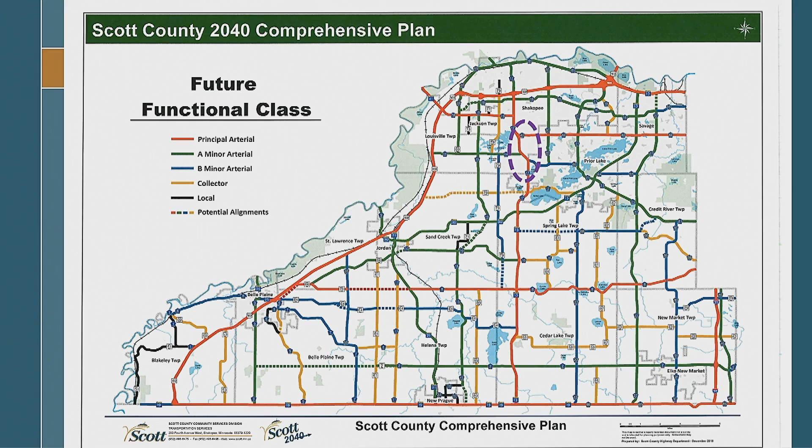Do we have a pointer that you can use? Let's see, is it the screen button? Oh, it doesn't work on the TV. How do we get it onto the monitor? Is there a mouse I can use, okay. There you go, thank you. See that? Okay. Proceed.

This purple circle is our project area. Highway 17 runs north and south through the center of the county, designated as a future principal arterial. It's pretty unique in the county, running continuously north to south, with a lot of connections to Highway 169, St. Francis Hospital, regional parks, and entertainment venues. The spacing makes a lot of sense, with 35 on the east side and 169 on the west, and Highway 17 running right through the middle. Principal arterials like 35 and 169 are that expressway, freeway type of roadway facility.

But it also includes something like 42 and 17, which maybe are a step down from that, but still the priority is on mobility and safety on those corridors and really making efficient trips through the county. The last thing I'll point out on 17, in terms of its unique position, is that it actually touches every one of the other principal arterials other than 35 on this map. From 169 to 78, 42, 8, and 19, it touches all of those, which is a key component of a principal arterial.

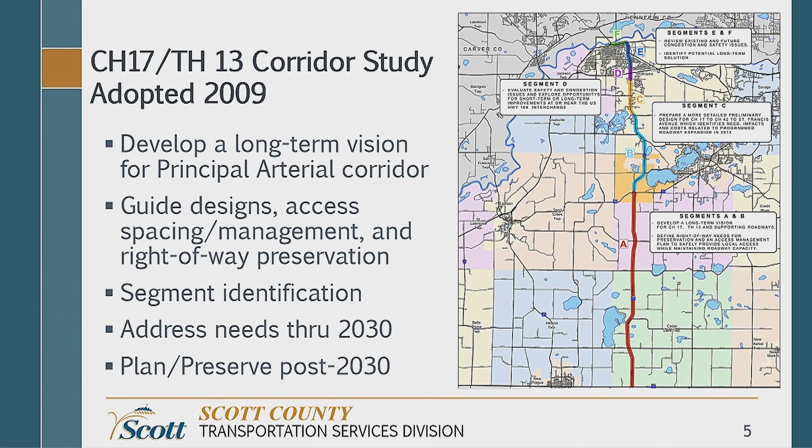So having that understanding of this as a principal arterial roadway, the corridor study was adopted in 2009, providing that long-term vision to convert this roadway to a principal arterial. It had various segments of projects to achieve that vision, and it addressed the needs for projects through 2030, and then also some recommendations to preserve right-of-way into the future beyond that.

One other thing mentioned in the 2009 study was a supporting roadway network, which is very critical for a principal arterial, because that facility is very focused on mobility and moving cars along it. There's a need to have roadways adjoining that to provide local connectivity to destinations. So there's obviously a lot of these yellow lines showing thoughts of supporting roadway networks that could happen from that 2009 study, and we'll have more on this later in the presentation.

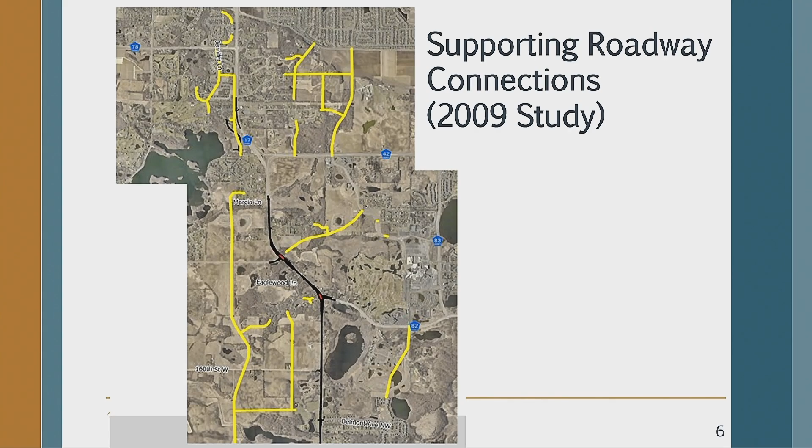I guess the one thing I'll mention, let me go back to that - Jennifer Lane is one road on the west side of 17, north of 42. In 2015, there was a county construction project on 17 to upgrade that segment, and Jennifer Lane was constructed at that time, which did provide a good local connection and helped mitigate the loss of access on that as part of that project. I kind of covered this on the map, so I'll skip over this briefly, but again, this is just why 17 is important as a principal arterial.

Just to mention that corridor study was obviously produced in coordination with our partners along the corridor: Shakopee, Prior Lake, the townships, and MnDOT as well.

So our project area falls within segment B of the corridor study. The corridor study recommended a 4-lane facility with intersection improvements, grade separation at 14 and 82. The ADTs, which is the daily traffic anticipated in the study in 2030, is much higher than what we're seeing out there today. So that's where I'll talk later about how we're trying to right-size this project based on the development that has actually occurred to this point and is expected in the future. It does identify some criteria for access management and trying to get it to that future principal arterial.

So a little more background, moving on from the corridor study, we have started to implement these projects over the course of the last 15 years. In particular, the red, yellow, and blue projects were completed in a span of 5 years, from 2011 to 2015, and those did upgrade 17 to a 4-lane road and manage the accesses along that as well.

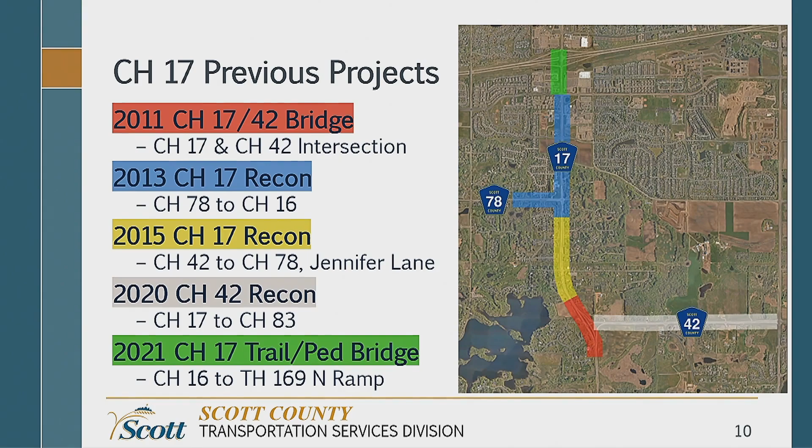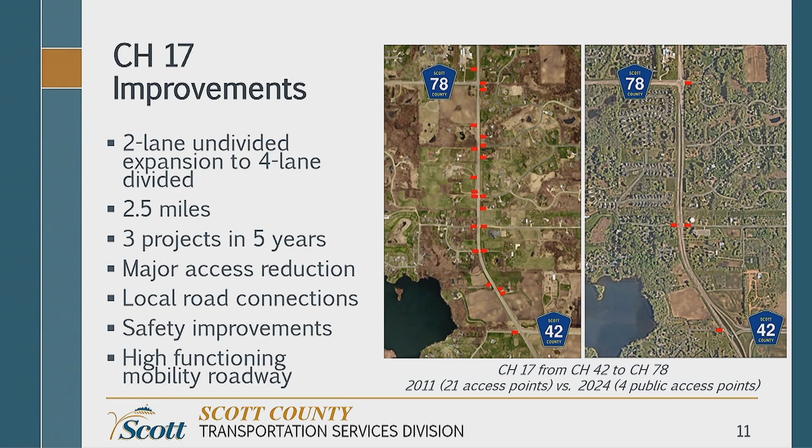And this really has resulted in a safe and highly functioning principal arterial in this area. This section has been converted officially to a principal arterial and functions very well today. All the folks that live to the south of here can use this roadway to get to a lot of destinations to the north, and we're trying to achieve those same goals here on this next phase to the south.

All right, so that's my preamble. This brings us to the project that we're planned for 2027. Our goal with that project is to design a safe mobility corridor consistent with the corridor study and achieving that principal arterial criteria. As I mentioned, we do want to right-size this project. The traffic volumes in this segment of the roadway of the corridor are not as high as was forecasted in the corridor study, and that has been a process that we've gone through with the PMT.

As Alex mentioned, the city of Shakopee, city of Prior Lake, and the Shakopee Mdewakanton Sioux are all on that project management team, and we've worked together starting with a visioning process, into layout development, and through the public process to get to where we are today with the layout.

What that project entails is a 4-lane divided highway. It does include improvements at Highway 82 and Highway 14. Those are not grade separated as proposed with this project. However, as I'll show in a future slide, there's opportunity to convert those to some grade separation in the future. That's accommodated with this design. The project also includes some access management in terms of existing driveways along 17 in this area, and then also with the secondary intersections at Eaglewood, Norton, and Marcia.

The project has a very large trail component to it, which is very exciting. I'll have a slide on that later on. And it does include some local road connections, similar to that Jennifer Lane project, to help mitigate some of the access management and continue to have that local roadway network to support the principal arterial. And again, this is planned for 2027 construction.

Questions? Okay, all right, thank you. This is the southern segment of the project, so I'm just going to go back real quick.

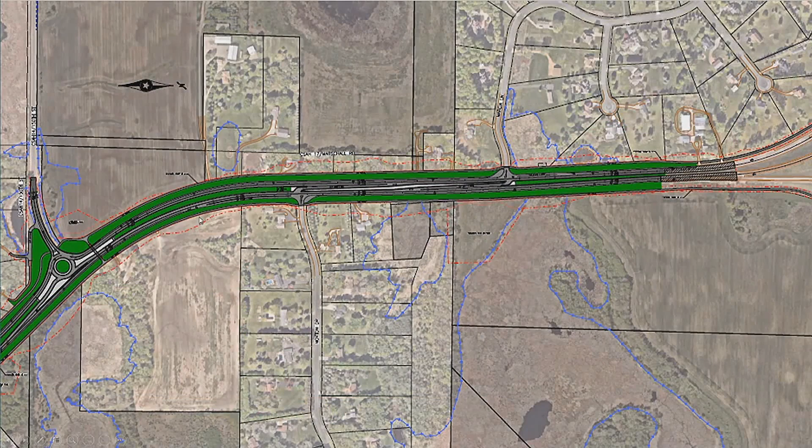This is Highway 14 and Highway 17. Wrong way, now I'm really going to confuse everyone. Highway 14 and 17, and now this is that same 14 and 17 intersection, so this is the next segment to the south. The local road in this area is Eaglewood Lane.

This is their only way in and out onto 17. It's proposed as a right in, right out. That's the same as we had it at the open house. We did not receive strong pushback on that at the open house. It is pretty reasonable as they're situated between the two roundabouts.

So just to walk through those same kind of movements: if they're leaving their house and heading south, they can take a right out freely. If they're heading north, they take a right, do a U-turn at the roundabout, and head north. Similarly, when coming home from the north, they can just take a right into the neighborhood. If coming home from the south, they would go up to the roundabout at 14, do a U-turn, and go in. And that distance is about a quarter mile in either way.

So we're proposing a new intersection on 14 that would come down here and feed into Bridge Crossing, which is what Eaglewood turns into within the neighborhood. It would provide a back exit for that neighborhood to get out to the west on 14 if they want. It also aligns with long-term development here to the south in Prior Lake. This goes down to 160th Street.

Would you be able to make a left on 14 coming out of there? Yes, you would. And who owns the property on both sides of that road? So this segment here is owned by the Shakopee Mdewakanton Sioux. That's that portion. And then this neighbor, Clemenhagen, is the last name of this property owner.

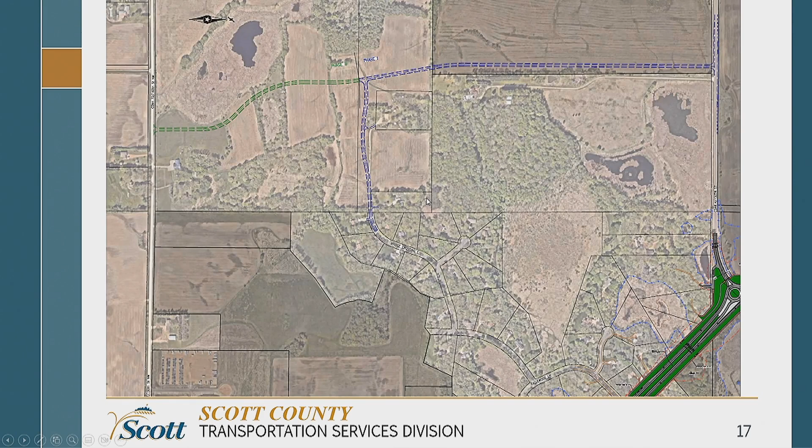And you're building that with sales tax dollars as well? Correct. Right of way - is Mdewakanton going to donate the right of way? That's the hope, we're working with them on it. They're definitely part of the conversation.

So I think that's kind of the layout. I'll bump quick back to the full view just to show south of 82 - the project tapers down to 160th, that's our tie-in point. Those are the storage sheds that SMSC constructed, if you're familiar with that landmark. So that's the extent of the project at this time.

Again, the corridor study discusses this going further south. We are looking at putting a roundabout at Highway 17 and Highway 12 to the south of here, in the same timing as this project, in Prior Lake and Spring Lake Township. And then MnDOT has proposed a project, or they're in the process of scoping a project, at Highway 17, Highway 13, Highway 282 - that funky intersection there. They're proposing, it sounds like, likely a roundabout in the 2029-2030 timeframe.

So those are some upcoming projects to the south of here.

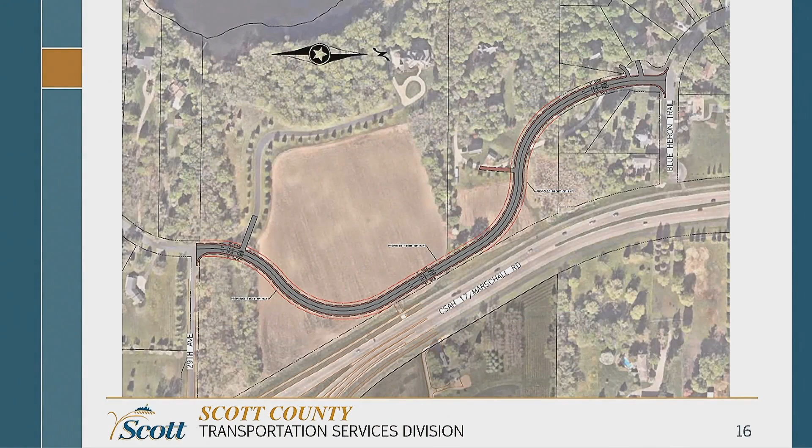Let's pass through these exhibits. You've probably heard this from Alex, maybe at his previous presentation, but just to touch on it quickly - the roundabout design at the two intersections. What we're proposing on the left is to be constructed now. It's a roundabout with a bypass lane, taking advantage of the three-leg orientation of these intersections, which affords us the opportunity to have a bypass lane in one direction at each of these intersections.

So here at 82, that bypass is in the southbound direction. If you're going straight on 17, you can just bypass the roundabout entirely. Otherwise, you go on the interior lane and make your maneuver as you would.

On the right is shown the future vision and how we could achieve that, hopefully with minimal cost in the future, building one bridge. We've already got the southbound bypass constructed. Now we need to bypass northbound so that they can stay out of the intersection. So we would build a bridge to take the northbound movement up and over the roundabout so they can continue without having to navigate an intersection.

And if you're trying to turn onto 82, you would go into the roundabout still, almost like an interchange ramp junction. So we think this is a good way to right-size the project - build what's needed now, but also set us up for the future if and when traffic out there dictates that.

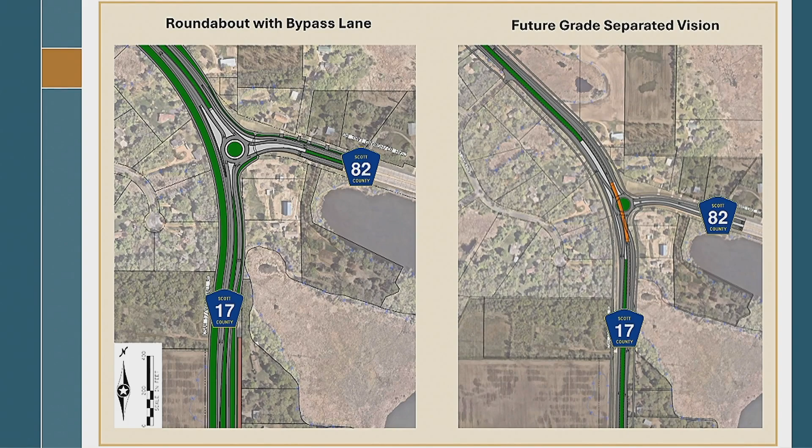This is just the same exhibit at 14. Again, what we're constructing today has this northbound bypass lane, so you can entirely bypass the intersection going northbound, or enter the roundabout if you're trying to interact with Highway 14. Similarly, we would build a bridge in the future to grade separate the southbound movement.

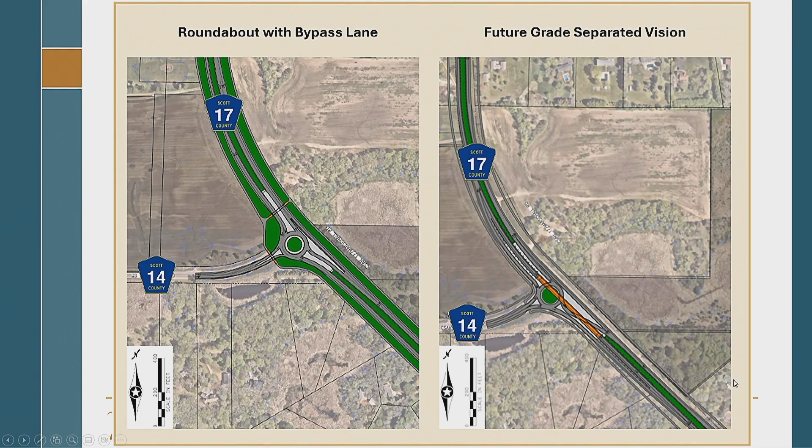Okay, I've got one slide on this, but I think this is a really important topic as well with the project - the trails that are going to be constructed. I'm going to focus on the figure on the right, which is what's being constructed with the project. The dark blue lines - or black as they look on the screen - are the trails being constructed with the project. It's along 82, both sides of 17, north of 82.

We are constructing this gap from 17, and then along the south side of 42, which is a current gap in the system. And we are proposing a pedestrian underpass crossing 17 at 14.

The county has a project programmed within the next 5 years to construct the next phase of our Merriam Junction Trail, which is under construction right now, but the continuance of that would be along Highway 14, all the way from 169 over here to 17. So with this project and that project in tandem, you can go all the way down 82, to Murphy-Hanrahan, and then take that trail all the way over to downtown Carver via the Merriam Junction Trail and the Big Woods Trail.

So I think this is a big improvement for the folks that live in the immediate area, just in terms of having trails outside of their house on 17 compared to being on the shoulder. These are going to be quite a ways away from the roadway, and they'll be pretty nice facilities to bike on. For the most part, they'll be 10-foot trails within the project area, as the regional trails will be. So it's a good improvement to the immediate area, but also fills some pretty critical gaps in our larger regional trail network.

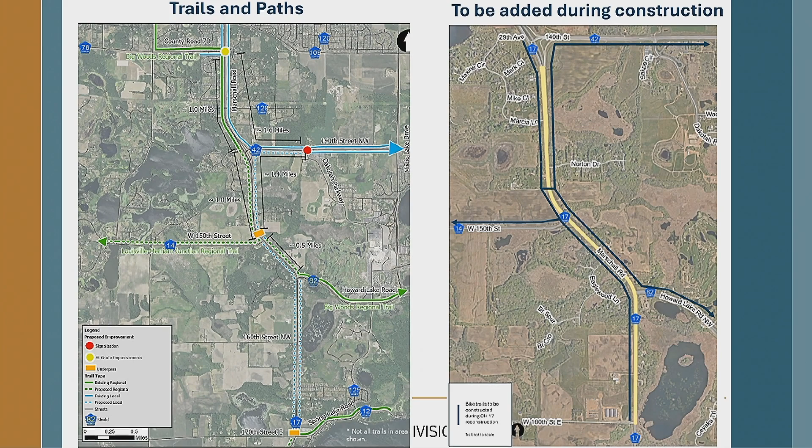Project timeline, we're at the crux of preliminary design and final design. That's what we would like to get approval from the city on, that you're on board with our concept and that we should move ahead with final design and right-of-way acquisition. We're looking to construct this beginning in 2027, and I expect construction to continue into 2028.

So that's the timeline. My final slide is on cost participation. This is a county transportation sales tax funded project. The county funding responsibilities will be all of the county highway construction as well as the right-of-way. That is different than our typical cost participation policy because it is a sales tax, so the city would typically have a share of that, but with it being a sales tax project, that is 100% county. We will also fund the local road connections and the right-of-way needed for those.

Then jumping into the city bucket here with the trails. Per the cost participation policy, the city would typically be responsible for 50% of the trails. Those would normally be an 8-foot trail, but a lot of the trails in this project are 10 feet since they're part of a regional trail system. So essentially that comes down to a 60-40 split on the trails for this project. The county would pay 60% and the city would pay 40%. You're paying for 4 feet of that trail, we're paying for 6. Is that the actual trail cost or land acquisition also? Trail cost. Not right-of-way.